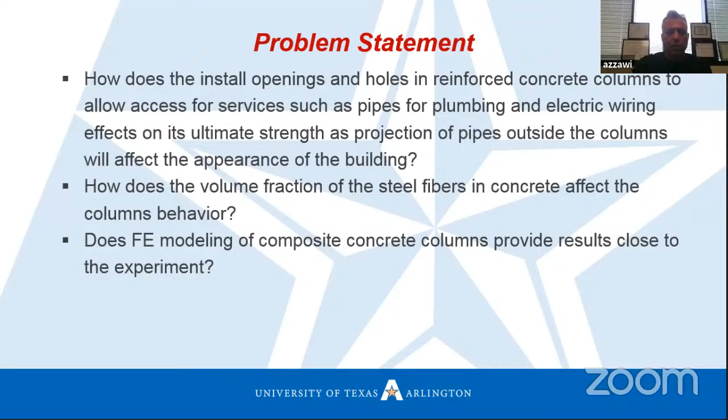In fact, we did the experiment. I did the experiment by myself, and we compared the experiment results with the finite element modeling. We keep in mind that openings inside columns are generally an access for drainage in some chemical buildings, or an access for pipes carrying harmful material. So how will that affect the column strength? Even ACI code 318-19 doesn't cover this issue, and they didn't have a solution for columns with opening. We have to go with the regular method.

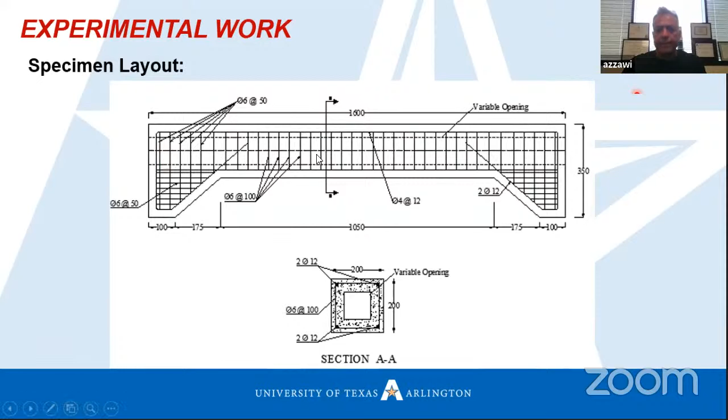This is the steel fiber I used, and I ordered it here from the US. It's galvanized steel fibers, and these are the properties of this type of steel fibers. I did a mix design based on ASTM C192 and C192M, providing these mix properties.

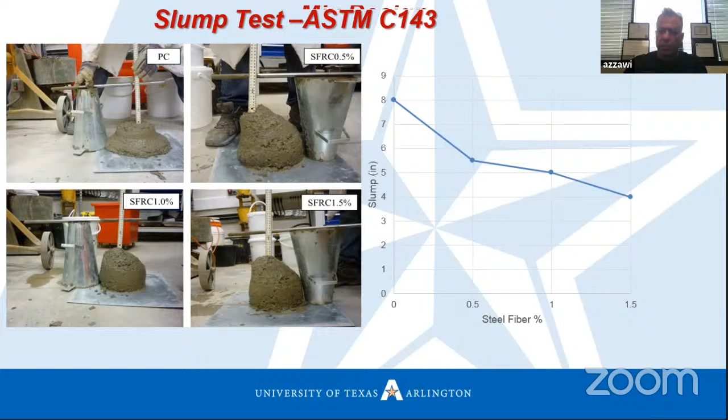Then we start to produce the concrete. First of all, we check the slump. As you see, slump without any fiber goes to around 8 inches. With 0.5% steel fibers, the slump is reduced. 1% is more reduced. At 1.5%, the slump is around 4 inches, which is accepted in practical work. Yes, the workability will be tough, but the strength will be high.

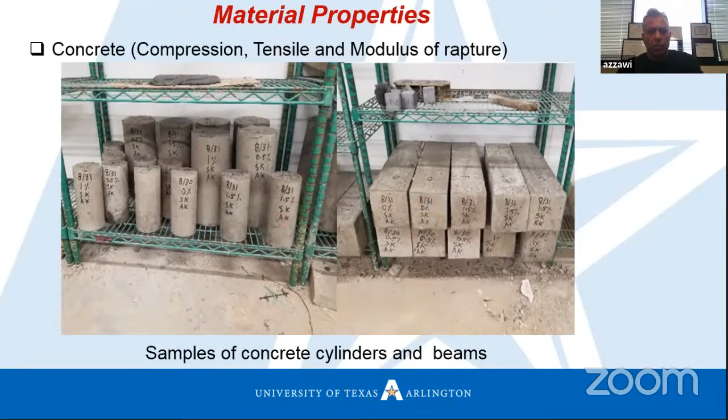After preparing our specimens, we put them in the curing room. In our lab at UTA, I prepared samples for flexural test, compressive cylinders for compression test, and cylinders for split tensile test. These are the samples: this one is for flexural test, this is for compressive test, and this is for split tensile test. So after 28 days, we started testing.

First of all, there is no formula to calculate the modulus of elasticity for mixed concrete with fibers. The ACI code gives us one formula we can use, but only for plain concrete without fiber. That's why I tested the modulus of elasticity and found it experimentally by using strain gauges, applying load, and obtaining the load-deflection shape.

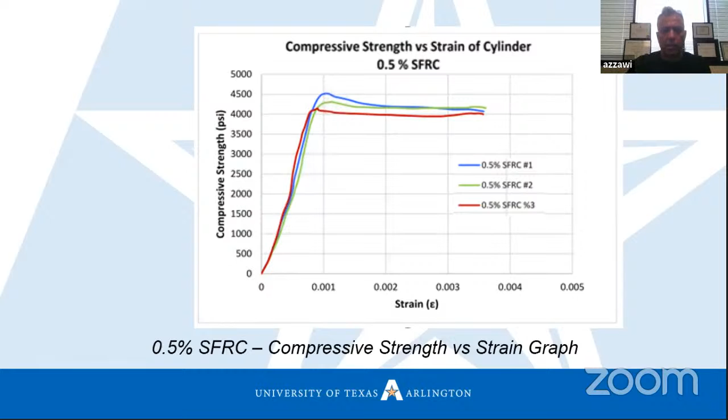This is for the 0.5% steel ratio. Then we make a regression analysis to find the modulus of elasticity for this type of concrete.

Also, we finished the compressive test based on ASTM C39. These are the cylinders we prepared, 8 inches.

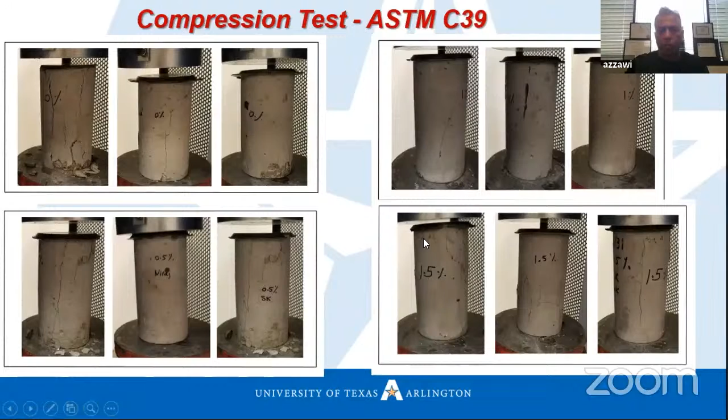This is the failure we have with 0 fibers, as we see. We have cracks here, really noticeable. With 0.5%, we have failure but not that much cracking. This is 0.5%, and this is 1%. For 1.5%, as we see, we don't have that much cracking. That's why the steel fiber makes the concrete behave in a ductile manner instead of as a brittle material.

This is the flexural test, modulus of rupture. Also, we have another machine. We apply 4-point load and find the modulus of rupture for different types of mix: 0% meaning plain concrete without fibers, 0.5% steel ratio, 1%, and 1.5%.

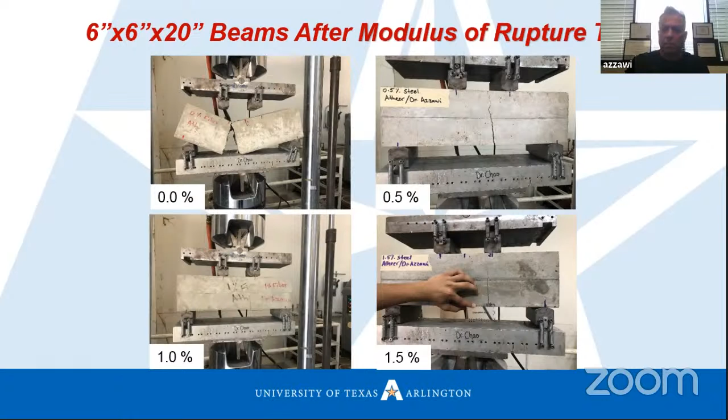As we see here, we have a brittle crack because we just have plain concrete without fibers. But once we put fibers, we see some ductile behavior and don't have that much cracking. With 0.5%, we have cracks, it's noticeable, but with 1% and 1.5% we have a crack, it's failed, but the behavior is still ductile.

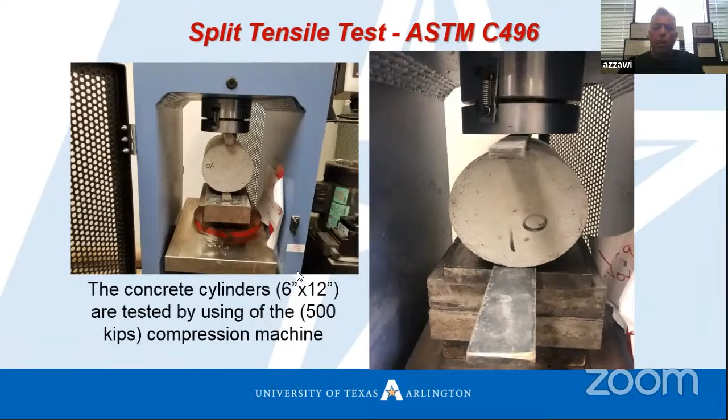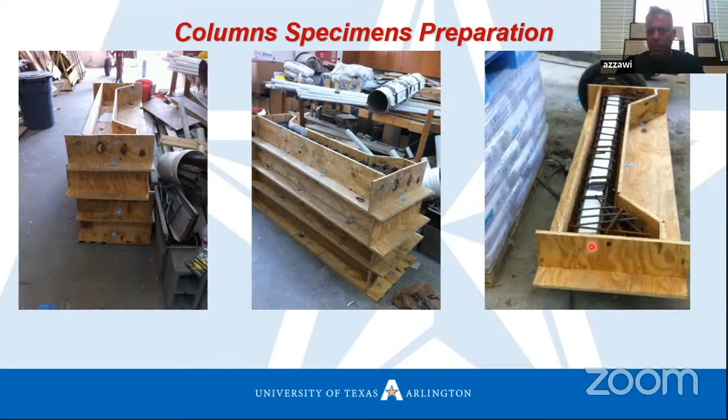These are the specimens prepared at UTA, University of Texas. This is the column, and these are the holes. I put styrofoam inside just to represent the hole, and this is the steel cage. After casting the concrete, these are the specimens. Then I prepare the instrumentation and the test setup for these specimens.

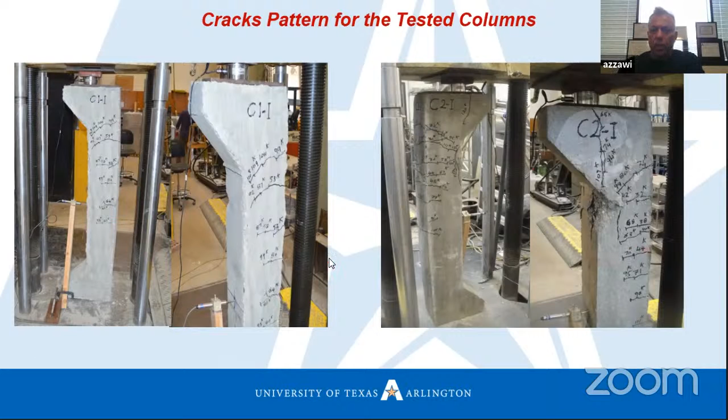So I tested all the specimens I have, and these are some results for the crack pattern of the tested columns. As we see, we have different strength and different crack patterns. Once we increase the steel ratio, the behavior is much better and can resist more load. The capacity is increased also.

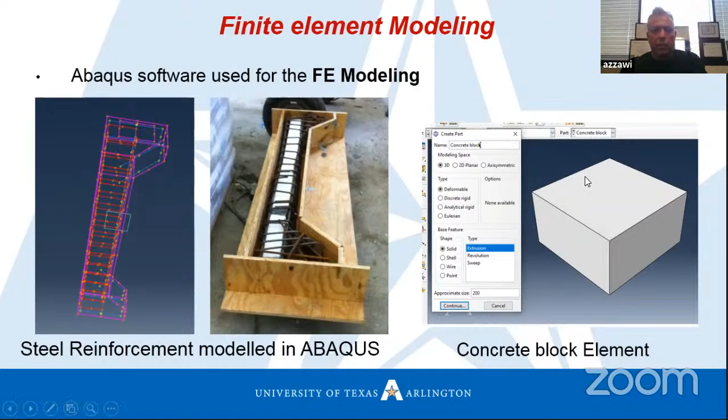Then I did the finite element analysis using Abaqus software. I modeled the strain, the steel cage, and the concrete. We used concrete block elements for the concrete and bar elements for the steel. So after assembly, I ran the analysis.

This table shows the comparison between the experiment and the numerical analysis. I have around 6.2% average difference between both methods, which I feel shows the modeling is fine and gives us good results.

Also, regarding the cracking load of specimens, I noticed that for specimen C5-I, meaning 10% opening with 1.5% steel fiber, the cracking load increased around 2.4 times compared to the same specimen without steel fiber. For a specimen with 20% opening ratio and 1.5% steel fiber, the cracking load increased around 2 times compared to the same specimen without any fiber.

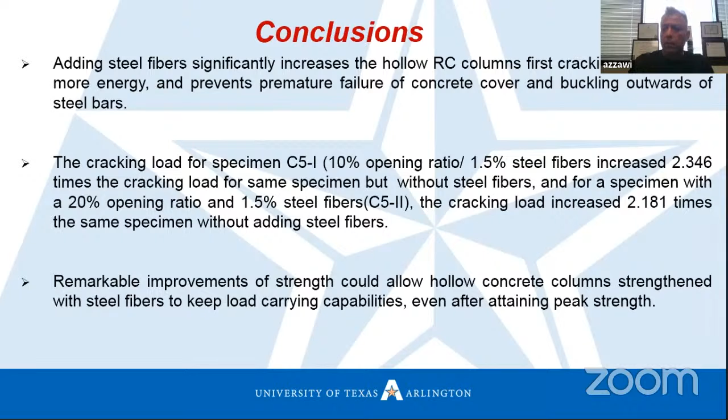This remarkable improvement in strength could allow hollow concrete columns with steel fibers to keep their carrying capability even after reaching peak strength. That's it in a quick overview, and I apologize because I don't have time to explain more. That's what I have briefly in my research. I appreciate your listening, and please let me know if you have any questions.

Thank you, Dr. Azzawi. Just to keep it in the record, let me ask this question: do you think it's going to increase the cost of production when you include these steel fibers? It's not going to be too much, right?

Yes, Dr. Rajab. In fact, the steel fiber is not expensive. It's cheap everywhere, not just here in the US, but also in Turkey and everywhere else. Also, the mixing is easy. Yes, using 1.5% or sometimes more will decrease the workability and make the work a little bit harder, but they still have additives that can improve the workability.

Yeah, but they can use additives for that, and it's for sure that it provides ductility, which is very important. So it's a pretty good work.

Why didn't you use circumferential strain gauges to provide maybe more data so that you could calculate Poisson's ratio as well? That's another work. You are right.

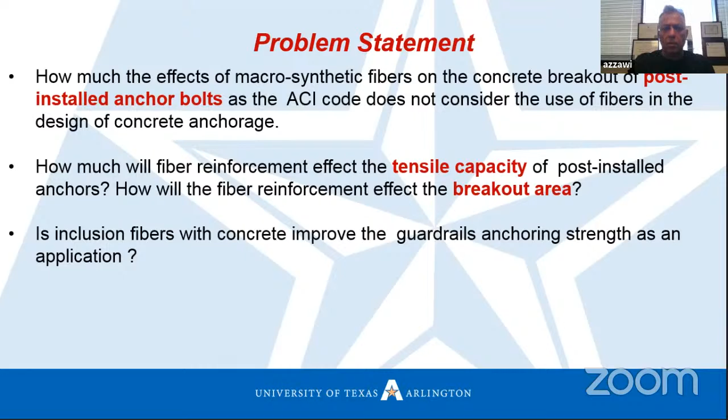What we did here in this research, we used post-installed anchors, which we mainly need in bridges, in guardrails, and for fixing pumps or equipment with the foundation. So the outline of the research is to identify experimentally the effects of macro-synthetic fibers on concrete breakout of post-installed anchor bolts. Heavy duty galvanized screw anchors with a finished hex head were installed within concrete specimens of different amounts of polypropylene fibers.

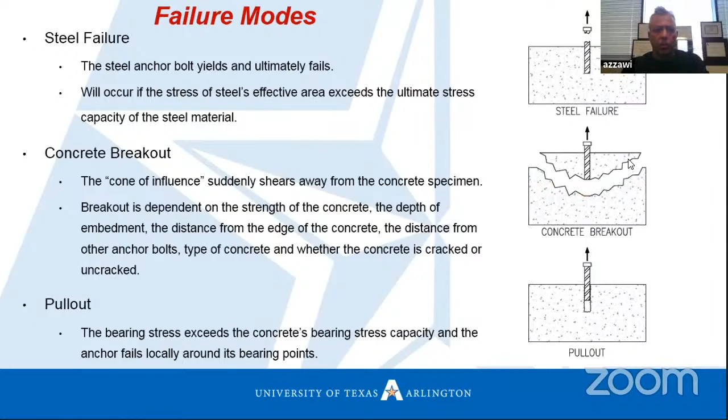So with any anchor bolt in tension, we expect either steel failure, where the anchor bolt itself fails by yielding if we have good anchorage between the anchor bolt and concrete, or concrete breakout failure, which is the common failure we have in industry. The other one is pull out, if we don't have enough bond, enough anchorage, enough development length for this anchor, so we expect to have pull out. The most common failure, as I mentioned, is the second one, which is concrete breakout.

The ACI code 349 gives us a formula for how to calculate the ultimate tensile strength of anchors. But this is without fibers, this is for normal concrete.

Also, the ACI code 318-19, in chapter 17, gives us another formula. It is modified and gives results more accurate than the other one. They consider a concrete breakout prism with an angle of approximately 35 degrees. This formula could be used for plain concrete to find the ultimate tensile strength of anchors, but as we see, it is without fiber.

That's why we need to find some formulation, some experiments to find the tensile strength of anchors with fibers. We prepared 4 mixes in the lab here at the University of Texas: one mix with 0 fiber, the other mix with 0.5% fiber by volume, and as I mentioned, this is polypropylene fiber, synthetic fiber.

The third mix is 1%, and the fourth mix is 1.5% fiber. This is the fiber we used, we ordered it from a manufacturer here in the US. We used MasterFiber, and these are the properties of the fiber we used.

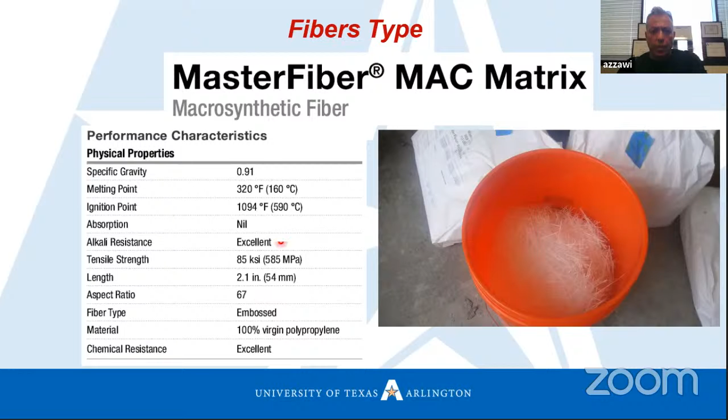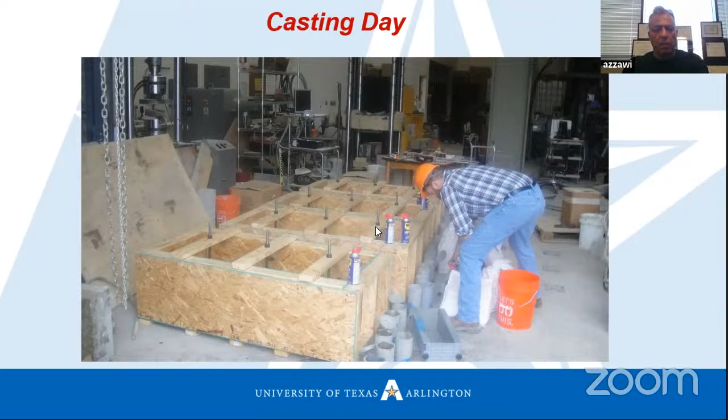These are the formwork we already started doing at our lab. This is the lab yard, and this is the building of the lab, the UTA. So we prepared different samples. This is Travis, my colleague, he already worked on the formwork. We tried to prepare the specimens ready to cast concrete, and we started casting the concrete.

We hired a volumetric truck here. This volumetric mixing truck has all the components inside: gravel, sand, cement, and also we give them the fibers. These are the fibers, and they mix it at the same time based on the mix design we already gave them, and they provide us mixed concrete with any percent of fiber.

So the concrete mix on site here, as we see, and we have our specimens ready for cylinders, beams, and also for the slump test. During the cast day, first of all, we start calculating and checking the slump just to make sure the slump is within the limits.

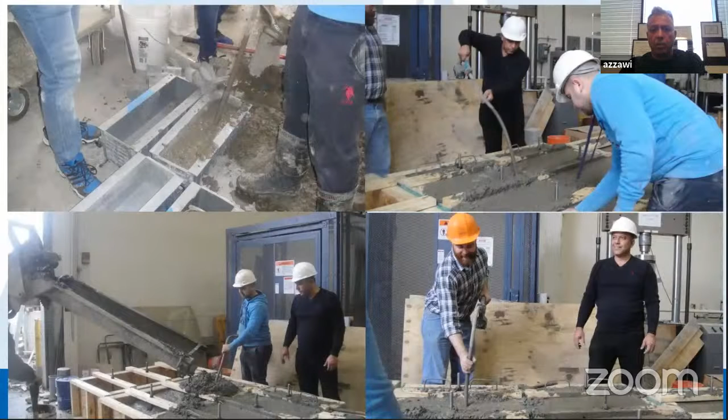As we see, this is a casting day. Then we start casting our specimens. We prepare our samples here, based on the ASTM, for compression, for tensile, and for flexure. I join them during the casting day to make sure everything is going correctly. These are the beams used for the flexural test.

After finishing the casting of our samples, we also store them in the curing room. After 2 days, 48 hours, we remove the formwork, then store it in the curing room. After 28 days, we start doing tests.

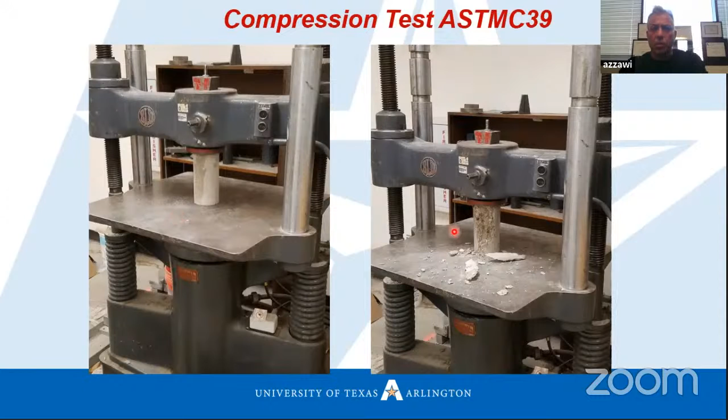We start with the compression test, based on ASTM C39. We also finish the splitting tensile test based on ASTM C496, and also the flexural test, as we see here. This is one sample with 1.5% steel fiber, synthetic, as we see. These are synthetic fibers, not steel fibers.

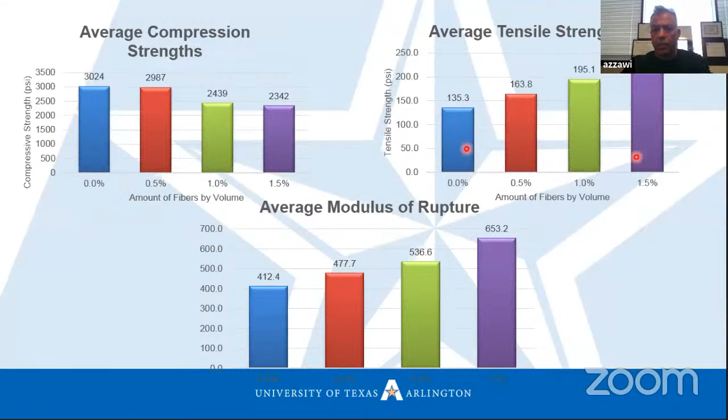We have the results for compression, for tensile, for modulus of rupture. The synthetic fibers increase the tensile strength very well, and also the modulus of rupture, but they don't help that much to increase the compressive strength, which we don't worry too much about. What we need mainly is to improve the tensile strength of concrete.

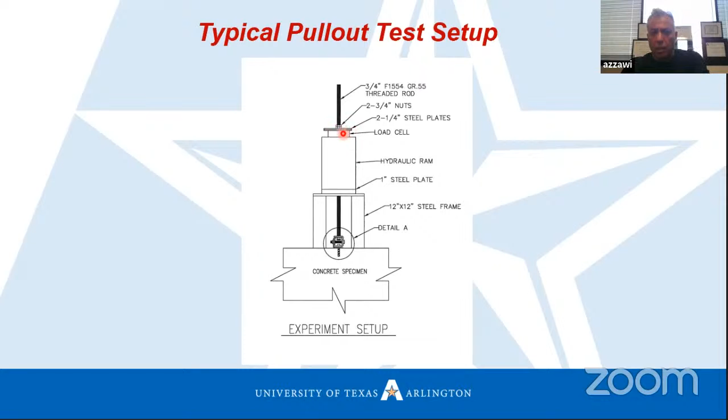So we use this type of post-installed bolt. This is the typical pullout test setup we did. This is our specimen here, and this is the bolt. And we provide the framework here for the test setup with a hydraulic ram and load cell. This load cell will give us the reading of the applied tensile load.

We apply tension to these bolts, and you will see how much tensile strength it can carry, what type of failure occurs, how much the concrete cone diameter is, and how much the concrete cone breakout angle is. More angle means more strength, more capability to resist, more tensile strength.

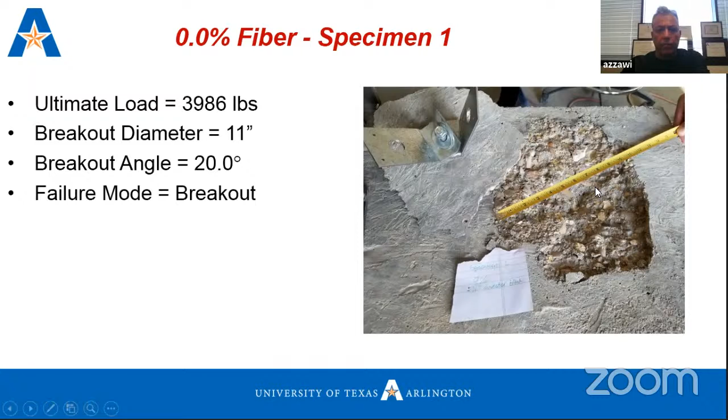And the failure mode is concrete breakout. This is another sample, also for the same mix, and still the breakout angle is not too much. This is the 4th one, and this is the 5th one. Then we take the average for all 5 specimens.

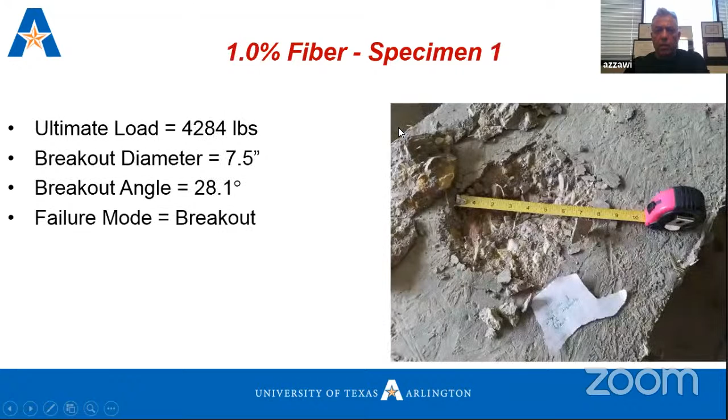The other specimens for the same percent fiber we also tested. We tested 5 specimens and recorded all the results. Then we go to the other mix design, which is 1%, and also record our results.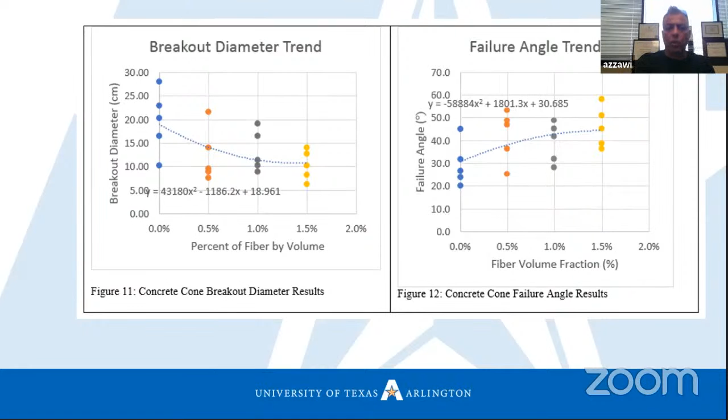This curve shows us increasing this fiber ratio will reduce the breakout diameter, or the damage area diameter, as we see with 1.5%—see how much the diameter compares with plain concrete. Also, the failure angle trend, as we see, increasing the percent ratio will increase the failure angle. With 1.5% we have this angle; with 0% we have a low failure angle. Low failure angle means we have more damage, more concrete cone damage.

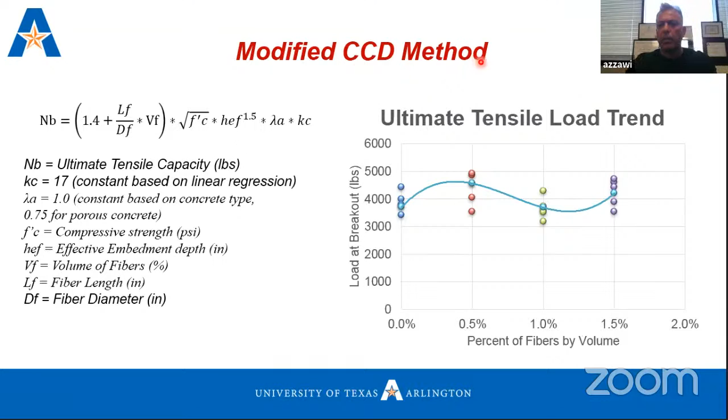After that, we take the ACI code and equation and try to modify it by applying a term here covering the addition of fibers itself. So we provide this term, L_f by D_f, for the steel or polypropylene fiber ratio, and try to check this formula and validate it with the experiment results. This trend shows us the results for using the modified CCD method, which is proposed by the ACI code. This is the comparison between the modified CCD method and the experiment—so we have a close agreement between both methods.

The main conclusions we can obtain from this study: the experiments revealed the concrete failure cone angle approaches 45 degrees, and its diameter reduced as the micro synthetic fiber dosage increased, so more fibers improve the behavior of the concrete breakout. Also, addition of fibers increases the ultimate concrete breakout capacity of the anchor by 29% for every 1% of fiber dosage. Addition of micro synthetic fiber increases the tensile and flexural strength of concrete, and the concrete mixture becomes more ductile.

The experimental concrete breakout strength results are close to the modified ACI code 318-19, which is available in chapter 17. A remarkable improvement of concrete breakout strength in tension allows use of fiber reinforced concrete in different applications, such as in bridges as guardrail anchoring, or in other applications.

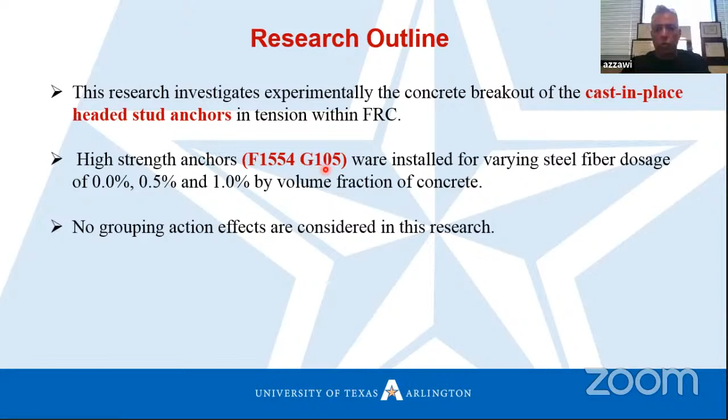In fact, we are not considering grouping action effect in this study—we make sure that the distance between anchors is enough, so we don't have any grouping action. So in this research, as I mentioned, we are using cast-in-place anchors, not post-installed like what we had in the previous one, and we are using high strength anchors just to make sure we don't have steel failure.

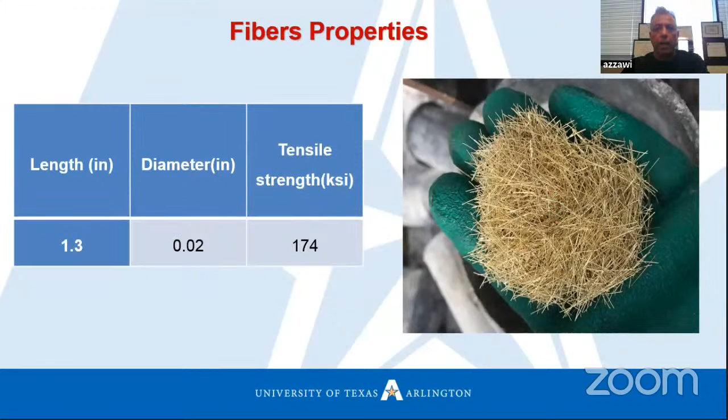These are the anchors I ordered, in fact, from the manufacturer, used as anchor bolts, and usually used at the base plates in buildings, many types of applications. We are using cast in place anchor bolts. These are the specifications. It's ASTM F1554, and it's a grade 105. The yield strength is 105 KSI.

I use this yield strength just to make sure I don't have any yield failure in the steel itself. I need the failure to be developed in the concrete itself. So we use 0.5 inches diameter with 8 inches length. Also, we ordered heavy hex nuts with coupling nuts, which are used in this research.

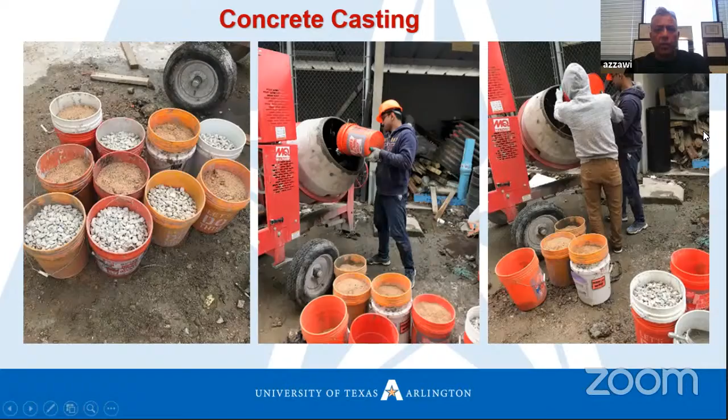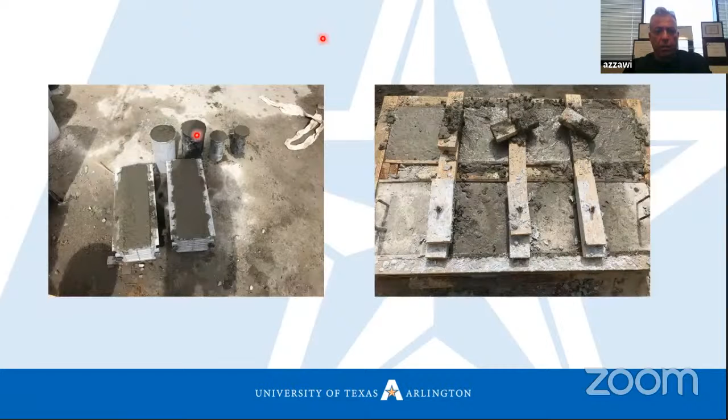As we see, these are the anchors installed already. These are the anchors installed. Also, I was with them during the casting day. We prepared also the beams, cylinders. This is for split tensile. This is for compression test, and these are for modulus of rupture. Check the slump also based on the ASTM C143. Then we start in the curing room.

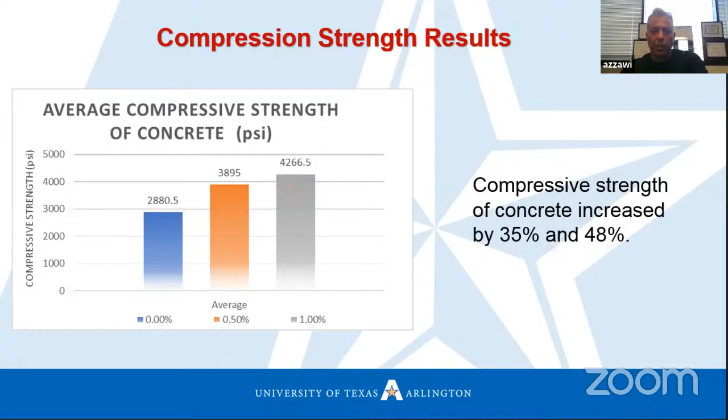After 28 days, we start testing these samples for compression test, and this is the result for compression test. In fact, with the steel fiber, we have an increase in the compression strength as we increase the steel ratio.

But the remarkable improvement is in the tensile strength, as we see here. So the split tensile strength increased around 40% to 112% compared with concrete without any steel fiber. And also we test the modulus of rupture based on ASTM C78, and these are the results. Also, we find there's a remarkable improvement in the modulus of rupture for these specimens.

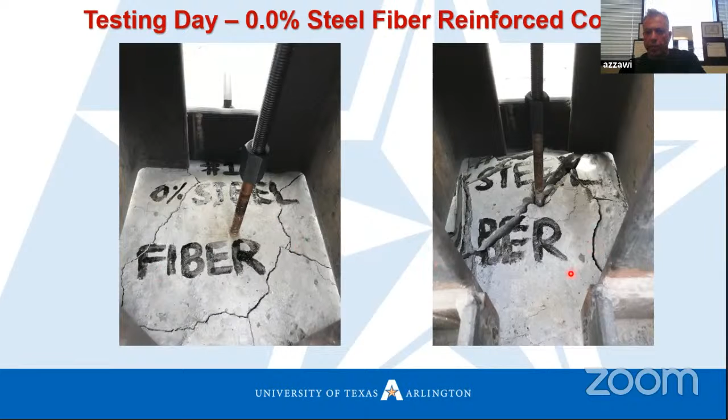These are the results at the testing day. This is for 0% fiber reinforced, and as we see, we have this damaged area. It's a big damaged area here. We have video here. I can show you how we start our test. So we apply tensile force, and this is our anchors as we see. We provide extension here and coupler here to provide tensile force.

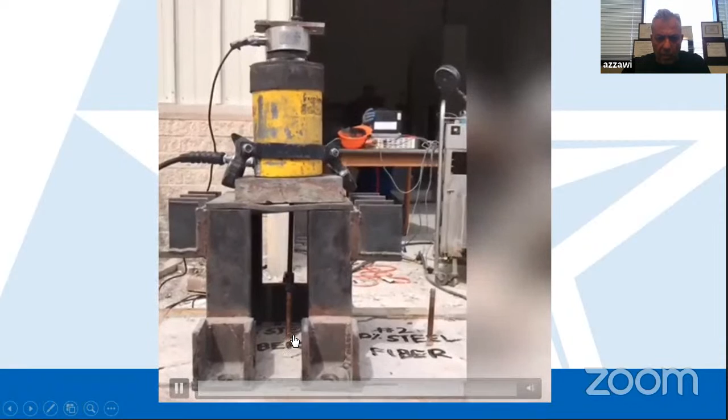And we see now, I hear the voice of the concrete, cracks here, and as you see, this is the failure, and that's it. The anchor bolt cannot resist more load here. This is the top view. This is the anchor bolt, and these are

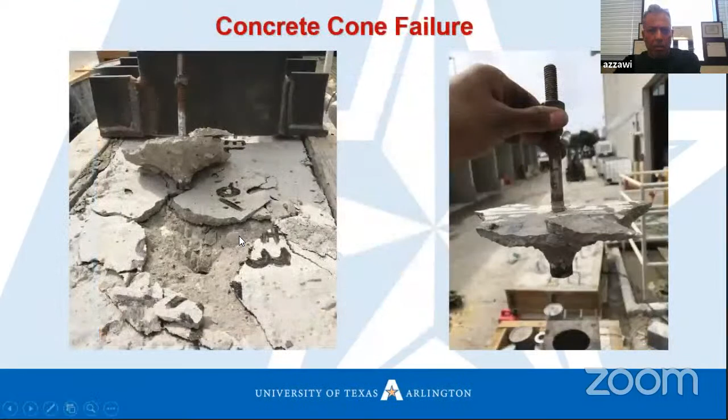our failure. As we mentioned, we try to avoid the grouping action. The ACI code says if you provide distance between anchors more than 3 times the embedded length, the grouping action will not be available. So we provide more than 3 times embedded length. These are the failures as we see, and these are the results for 0%. So on average, this bolt can carry 5,794 pounds as a tensile force.

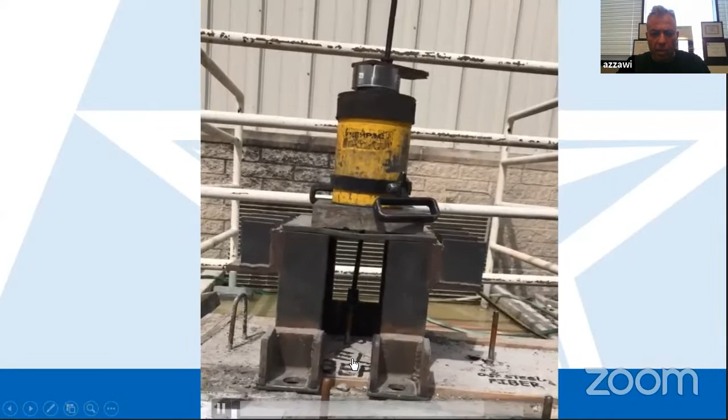Now we go to the other type of mix design by providing 0.5% steel fiber to the concrete mix, and we will see what results we have. Also, I have a video here, this is 0.5% fiber, and these are our steel anchors. They behave a little bit different, honestly. The concrete carries more. The breakout cone is not too much, and we don't have pull-out. That means the concrete behaves as ductile.

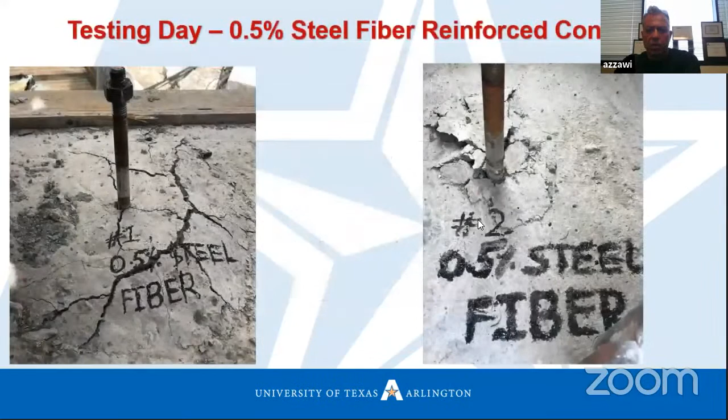Even the cracks we have, it is not too much cracks. See, this is 0.5. See how much cracks we have compared with 0% fiber. So we have really good results with 0.5% steel fiber, and the results also improved. The average is around 10,000 pounds, and the previous without fiber was 5,000 pounds.

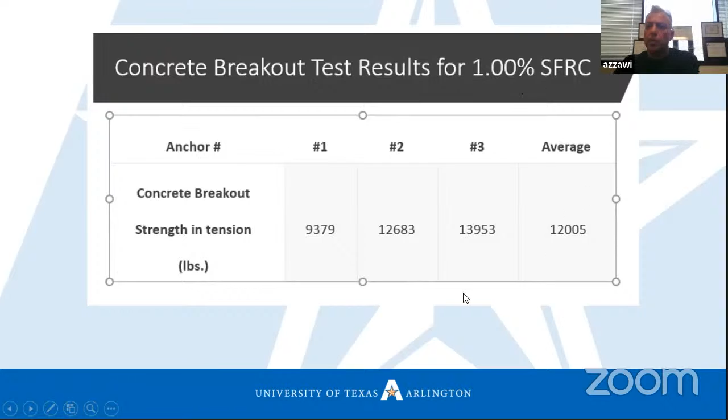It's 12,000 compared with 10,000, but still I recommend to use 1% steel fiber with anchor bolts. This is my recommendation.

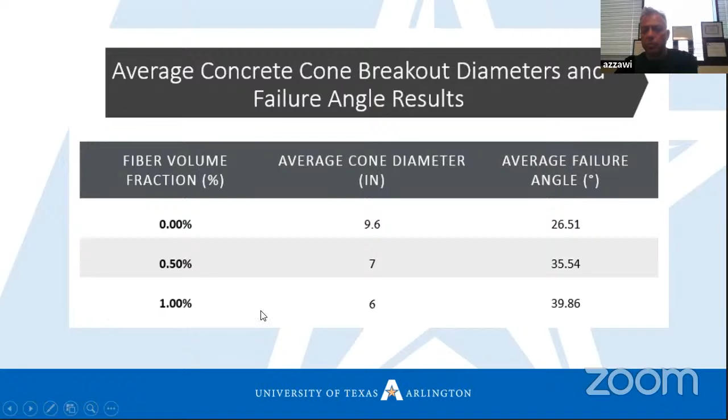We have a table here showing the average cone diameter and the failure angle. As we see, the angle increases if we provide more fiber, and the diameter of the cone decreases compared with plain concrete. These are the results. The average breakout capacity of concrete in tension shows remarkable improvement. This research concludes that the concrete breakout strength of anchors in tension increased by 77% for 0.5% steel fiber dosage, and 107% for 1% steel fiber dosage in comparison with plain concrete.

Also, the failure angle increased with increasing dosage of fiber. The failure angle approaches 40 degrees as the dosage of fiber increases to 1%. The diameter of the cone of influence decreased as the dosage of fiber increased. I feel this is very good research that we can use in our applications. I appreciate your listening, and please let me know if you have any questions.

Thank you. It was very good experimental work. It's obvious that the behavior of the concrete improves by adding those fibers. It's pretty nice. You're sending your reports to Texas DOT, right? Yes, I already did, and we work with them on that. Thank you. Okay, can I ask a question, please?

Let's go with the fourth one, Dr. Azzawi. Yes, Dr. Recep, I really appreciate your patience. It's always a pleasure to talk to you, my friend. Thank you. So what else do we have? All are experiments, correct? Yes. You like it, I believe. Always. I did my PhD with a lot of experimentation too. That's why I like experimental work much better than numerical.

Yes, so I just want to share this also with you, Dr. Recep, and the others. So can you see my screen? Yes.

Shear strength within fiber. In fact, this research shows us the experimental investigation of anchors' shear strength. So we check, in fact, shear strength, not the tensile strength, within fiber reinforced cement composite under different loading rates. Also, we did this research at the University of Texas. An investigation was conducted to identify the behavior of fiber reinforced cement composite on the concrete breakout shear strength with a steel stud under different loading rates.

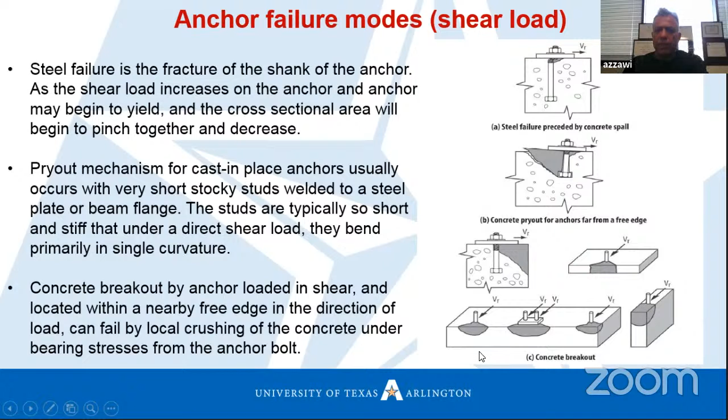This slide shows us the anchor failure modes for different types of behavior. First failure mode, we have steel failure preceded by concrete spall. If we provide shear at this anchor, we expect shear failure at the steel itself. Or we have concrete pryout of an anchor far from the free edge, which is the common one. When the anchor bolt is close to the edge and we apply shear, we expect concrete breakout as we see here. These are the three anchor failure modes.

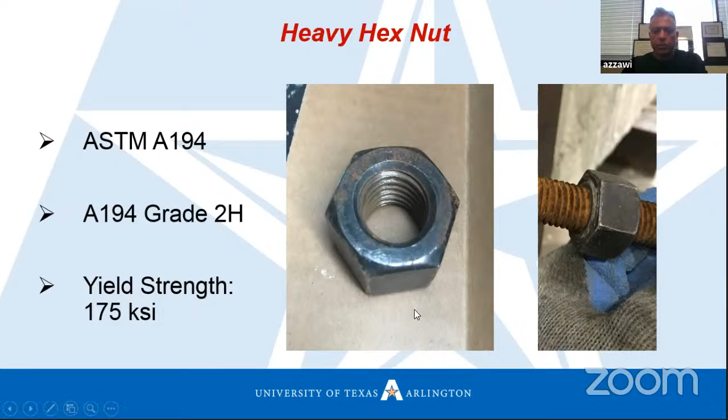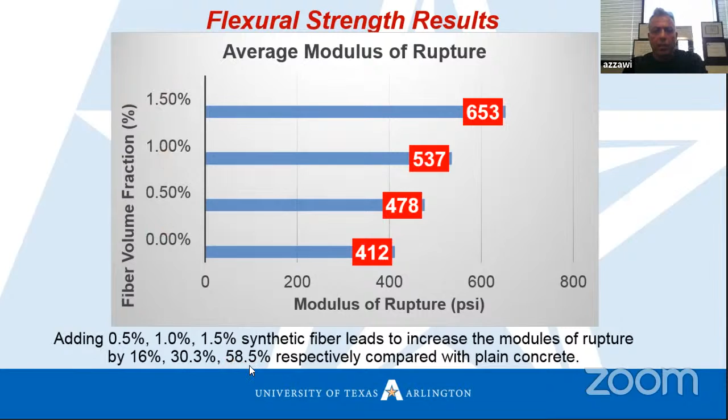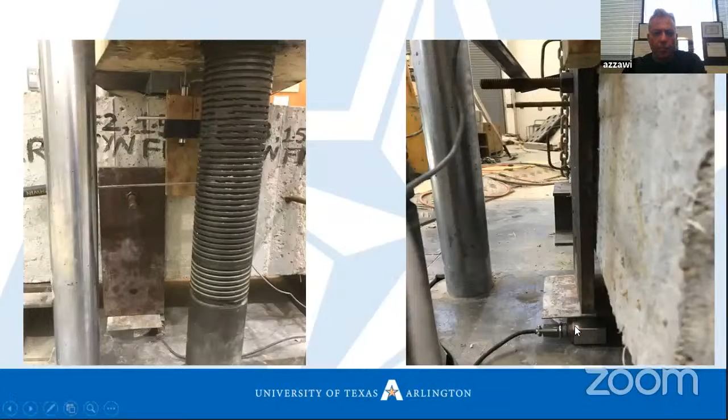These images show us more. This is the LVDT, this is the anchor bolt, these are our nuts. All the LVDT and load cells are connected with the StrainSmart software, which records the forces with the strain and the deflection. This slide also shows the test setup to check shear for the anchor bolts. These are the channels we connected with the software: one for the LVDT and the other for the load cell. We can apply the load from here and modify the loading rate as needed.

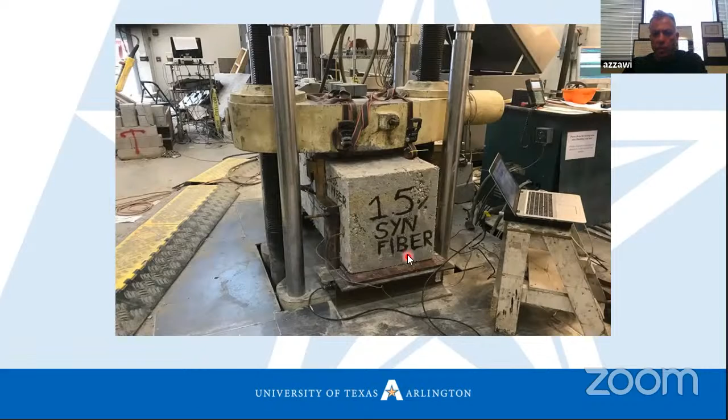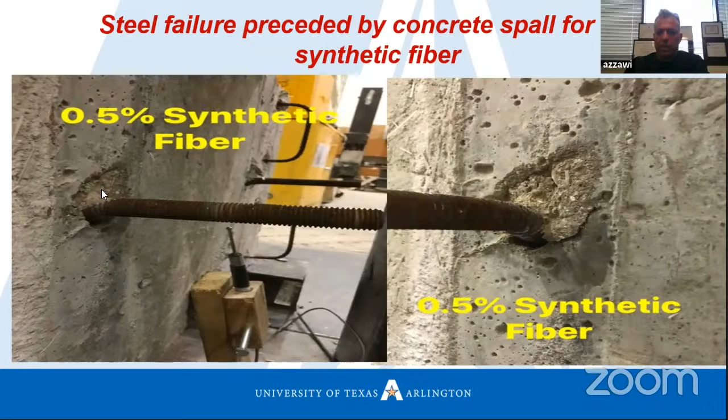This is 1.5% synthetic fiber. After testing with 0% synthetic fiber, the failure mode is steel failure. This anchor bolt failed by shear, preceded by some concrete spalling, as expected from the earlier slide. If we provide fiber, the failure mode is still steel failure preceded by concrete spall, but the damaged area is less than in plain concrete. With 1% fiber, we don't have much damage in concrete, just a small portion around the anchor bolt; mainly the steel anchor failed by shear. The anchor cannot resist more shear.

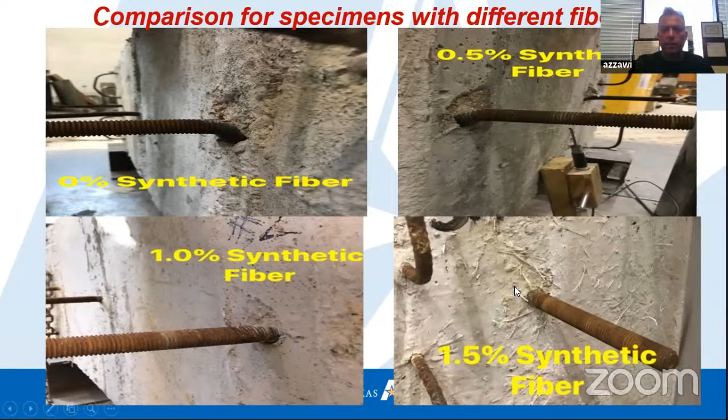This is the comparison of specimens with different fiber dosage. This is 0% fiber, plain concrete; we have a big damage area here. With 0.5 we have less. With 1.5 we normally don't have concrete damage, just a small portion around the bar itself. These are the results gathered from the experiment. Providing more fiber dosage will decrease the failure load. With 0%, we have around 24,000 pounds.

I can say that is because the synthetic fiber we used really affects the workability a lot, and that will affect the concrete properties itself. So with synthetic fiber, I recommend going with 1% fiber dosage, not more than 1%.

With steel fiber, yes, we can go more than 1%, but with synthetic fiber, increasing it more than 1% will really affect the workability and also the compressive strength. That's what we noticed from the test.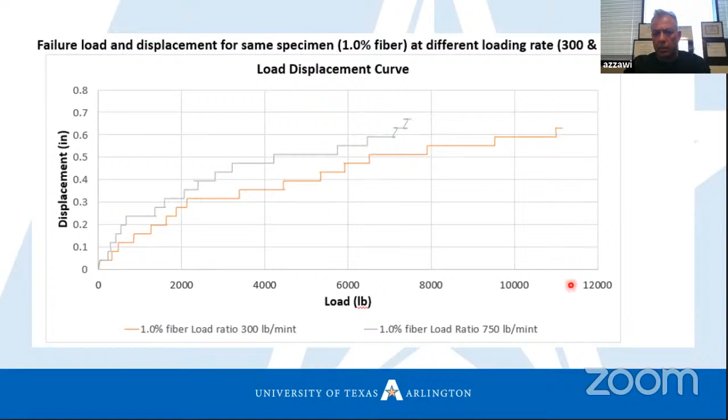We also did this for the other specimens, which is 1% fiber for both loading rates, as we see. So high loading rate reduces the strength; slow loading rate increases the strength and reduces the displacement. These are the results we obtained from the experiment for both loading rates, 300 and 750 pounds per minute.

As we see, for example, with the 0.5% steel ratio, 300 pounds per minute gives us 23,000 pounds, while 750 gives us 18.87 thousand pounds. Also for 1%, we did the same thing. So increasing the loading rate will reduce the failure load, and also increase, as we see here, the displacement.

The conclusions we can get from this test: increasing the loading rate leads to decreased failure load and increased anchor bolt displacement. Concrete crushing around the anchor bolts decreases as the synthetic fiber dosage increases. Anchor shear failure mode depends on the size of the anchor and the concrete cone of influence, and it depends mainly on the fiber dosage provided.

Steel anchors under shear test experience high deformation and finally fail by shear associated with concrete spalling around the anchors with low fiber dosage. Concrete mixture becomes more ductile as synthetic fiber dosage increases, and 1% synthetic fiber is recommended.

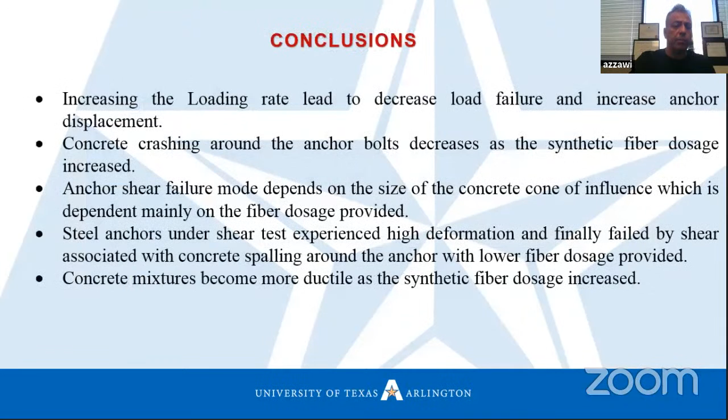All right, thank you Dr. Azzawi. Yes, it was, thank you doctor. I'm sorry for being late, but I just needed to cover what I have. Yeah, no problem, no problem. I just have a question.

Why did you increase the loading rate to 750 pounds per minute instead of 300? In fact, the main target of this research is to see if we increase the loading rate - especially in dynamic force, in pumps, in vibration, sometimes in bridges - does that affect the capacity of the anchor bolt or not? We noticed that increasing the loading rate really affects the capability of the anchor bolt against shear.

How did you come up with that number? Why did you choose 750? Why not 500, why not 800, why not 1000? We have specifications, the ASTM E488, so we went with these specifications, and they give us some range we can follow.

Oh, I see, 750 pounds per minute. Good, it was reasonable for cyclic loading, for dynamic loading. That's why. Okay, that's very nice, thank you very much.

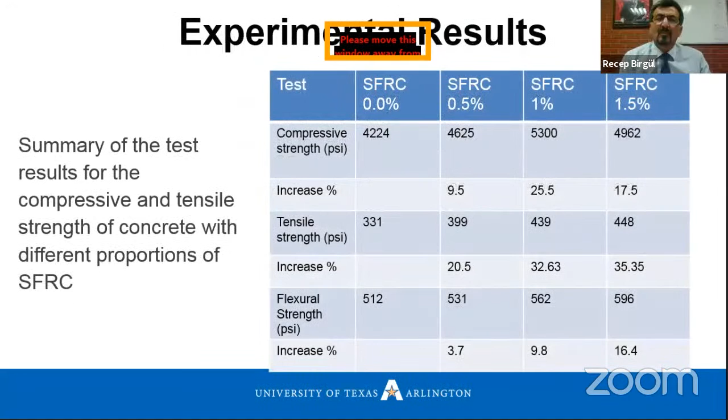So we have this research study on the grouping effect on concrete breakout strength. We have experimental results already done, and we need to evaluate these results with finite element analysis using Abaqus software. The experimental results are already available for compressive, tensile, and flexural strength of the concrete.

We need to see how much that will affect the strength of the anchor bolt individually. So if we test one individually, and if we test the same anchor bolt with the same properties within a group, how much will that affect it? This is not available in the ACI code, honestly—they didn't give us reasonable results for the grouping factor. But we tested it, and now we have an idea.

The experimental results show us the concrete breakout strength in tension for different mix designs: 0% steel fiber, 0.5%, 1%, and 1.5% steel fiber.

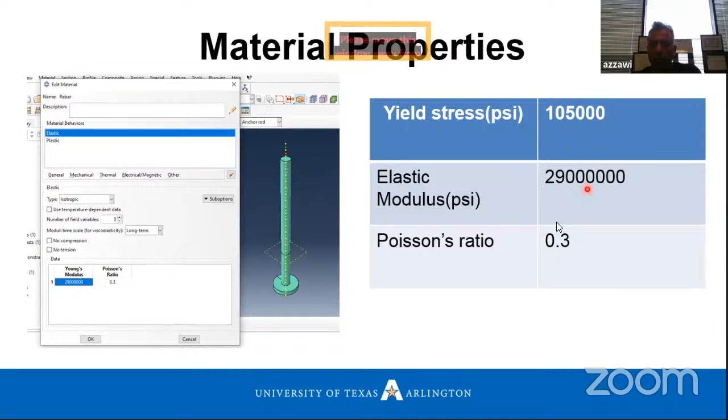For the finite element modeling, we use the bar element for the anchor bolt and solid elements for the concrete block. Here are the material properties for steel: the yield strength, the modulus of elasticity, and the Poisson ratio.

And this is for concrete damaged plasticity, where these factors are available as default in the software itself. And here we have the material properties and test setup, as we see.

We will see how much the grouping effect changes the strength of the individual anchor bolt. By the way, we already have the strength of the anchor bolt individually—we tested that before, so we know how much this anchor can carry, as we see from this table. These results are the strength of the anchor bolt individually, without any grouping action.

So we did the modeling in Abaqus, and this is the numerical assembly. The embedded anchor bolt, as we see here, was modeled inside the concrete unit. We used displacement control to apply the load.

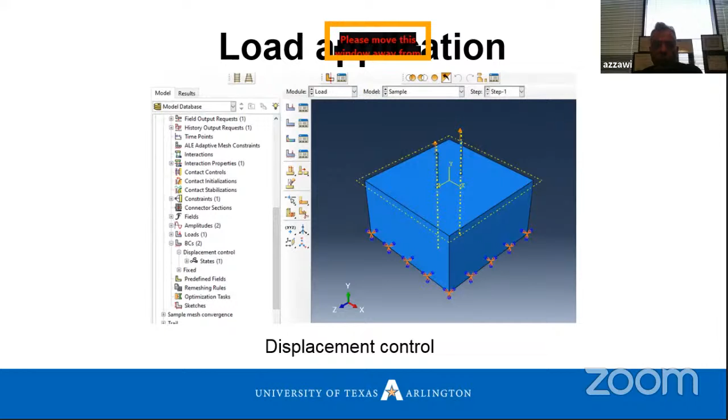In Abaqus, this is the test setup. As we see, we have 2 anchor bolts tested at the same time, and we have all these test instruments. We tried to match the modeling, especially the boundary conditions, with the experiment.

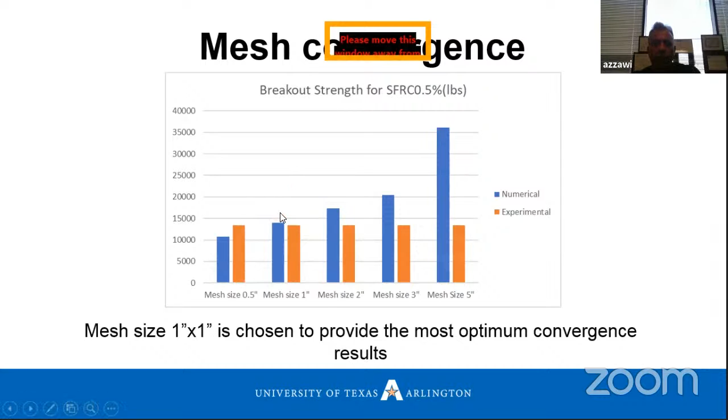Creating the mesh was a challenge for us, honestly. We tried different mesh sizes, then selected a mesh size of 1 inch by 1 inch, because this mesh gave us results close to the experimental results, as we see. The other mesh sizes showed a difference between the results. That's why we used the 1 inch by 1 inch mesh.

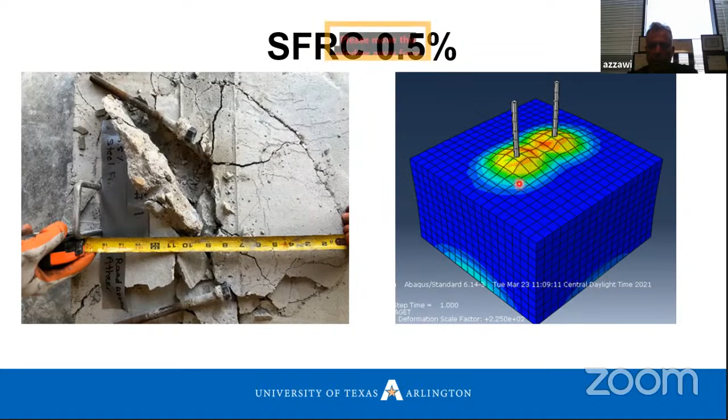We measured how much. This is for 0.5% ratio steel fiber, so the concrete breakout failure is a little bit less compared with 0%. And with 1%, as you see, the damage is less compared with 0%.

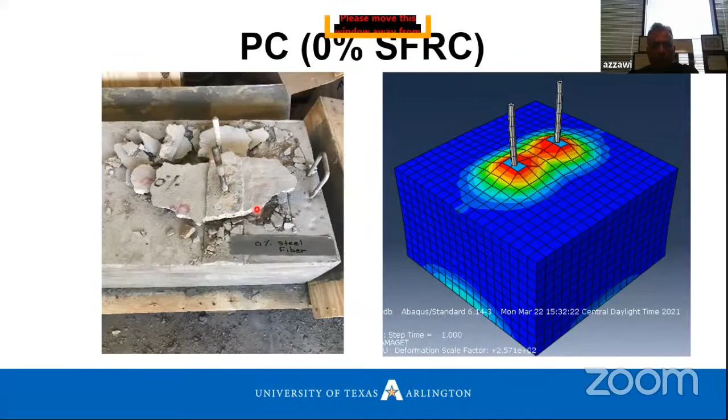Then we also did modeling for a single anchor bolt, just to see how much it will carry. And these are the results. This is the grouping factor effect, which comes from the experiment. If we test one anchor, a single anchor, without the grouping effect versus with the grouping effect, we see there's a reduction in strength around 0.81. The grouping effect factor is 0.81, meaning we have a reduction in strength of about that amount.

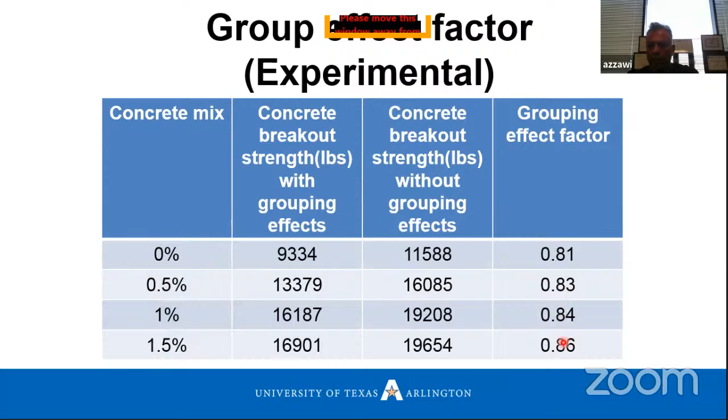If we increase and put steel fibers, we also have a grouping factor ratio available here. Numerically, we have these results too. It's close to the experiment, not exactly the same, honestly. We have a difference, but that's expected, since numerical analysis usually won't match exactly to the experiment. We have around 10% difference, which is accepted. So this is for single bars without grouping action, and the other for groups with grouping action. This shows the difference between the numerical and experimental results with the percent of fiber and the concrete breakout strength. As you see, increasing fibers will help a lot to increase the concrete breakout strength.

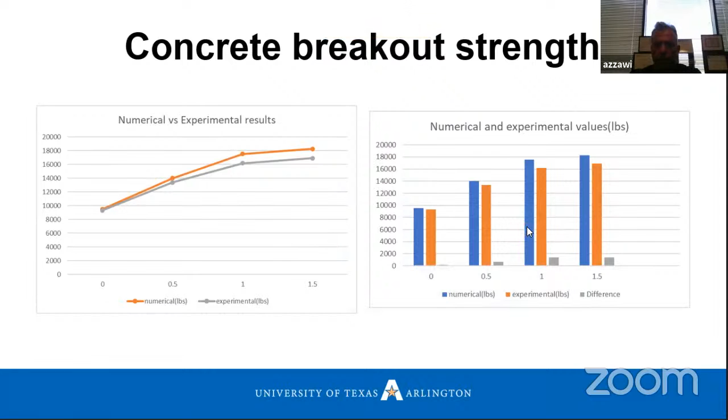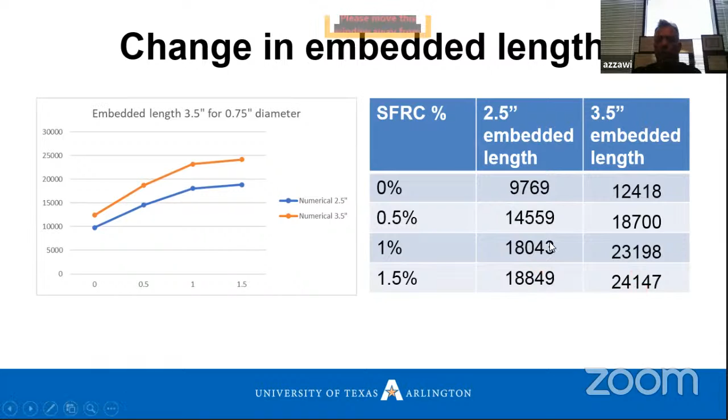Changing the embedded length has an effect. If we change the embedded length from 2.5 inch to 3.5 inch, we will see there is a difference, as we see here. Increasing the embedded length will increase the strength of the anchor bolt in tension. See how much it increased: 2.5 inch embedded length gives us 9.7 kips, and 3.5 gives us 12.4 kips. Increasing the fibers will also increase the strength if we increase the embedded length, as we see here. So more embedded length will help increase the concrete breakout strength.

In general, I feel this is good research because it really studies the effect of grouping action experimentally and also numerically, which is not mentioned in the ACI code. We don't have numbers for how much grouping effect factor we have to use, but with this study we now have some values we can use. The nonlinear finite element analysis shows good agreement with the experimental results, and the use of the concrete damage plasticity model in Abaqus seems to be the most appropriate for this simulation.